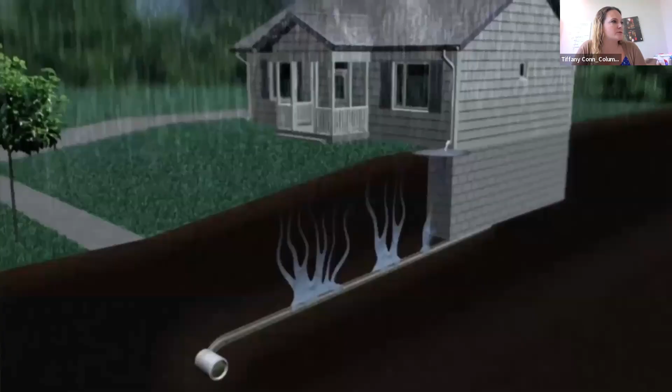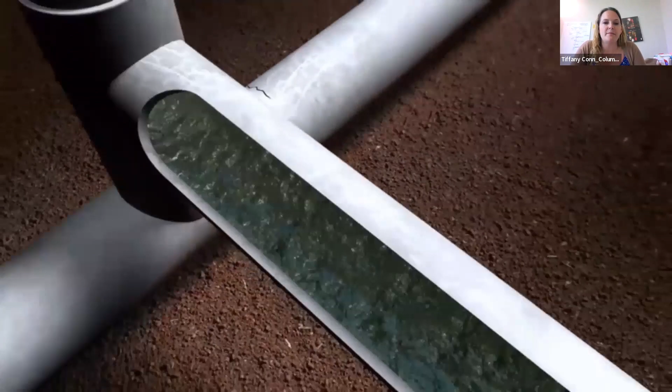So what's happening, and the reason why we're doing this project, is that rainwater is getting into our sanitary laterals through cracks and holes that could have been created because it's an old pipe or tree roots got in there or just damaged. What happens is that water fills up the sanitary pipe and it overflows. And so the mechanism for overflow that we have is that it goes up into your basement, or could also go out into the rivers and streams.

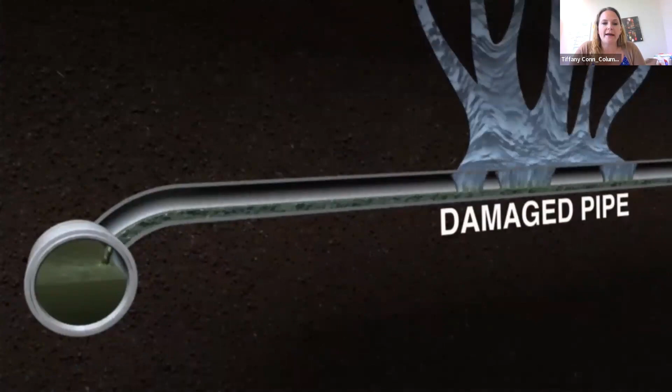So the sanitary sewer was not built to handle both wastewater and rainwater, and that is the reason that it is overwhelming with all this extra rainwater that's getting in and either backing up into your basement or overflowing out into the rivers and streams. So the EPA said that's not okay. We have to fix that problem here in Columbus. So Blueprint Columbus is our solution to that. We could have built lots of bigger pipes. We have that question a lot, but we tried to be proactive and innovative with our solution and thinking about how do we actually attack the problem at its source.

The way we do that is investing in fixing the existing infrastructure. So we actually want to seal up those holes and seal up that system and keep the rainwater from getting in there in the first place so that we can fix the problem at its source.

We use local materials, local crews for the most part, and we use native plants always. And these are key parts of our project. Native plants help just keep everything here. They're special plants, so they can handle rain, they can handle drought. We use all native plants in our gardens.

And also we want to improve stormwater discharges. So we're trying to fix the problem itself, but then also create better, cleaner quality water in our rivers and streams. And we do draw our drinking water from some of those sources, so that just helps to improve it from the source.

Our project adds permanent local jobs. So not only do we need people to build rain gardens and do the other work that we have on the project, but we also need a workforce to maintain them. So our actual project goes to 2045, but then is indefinite as far as maintenance goes. So that is definitely a permanent local job that we are creating, many of those.

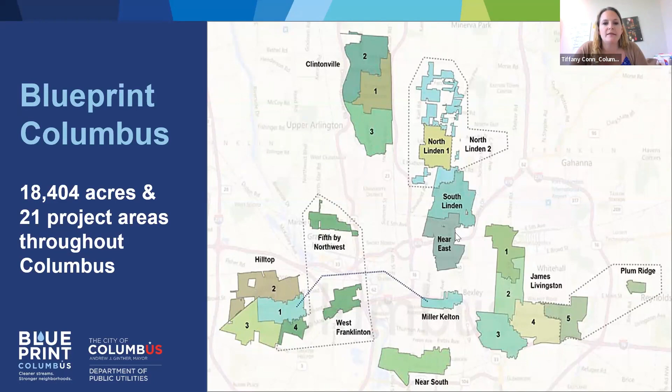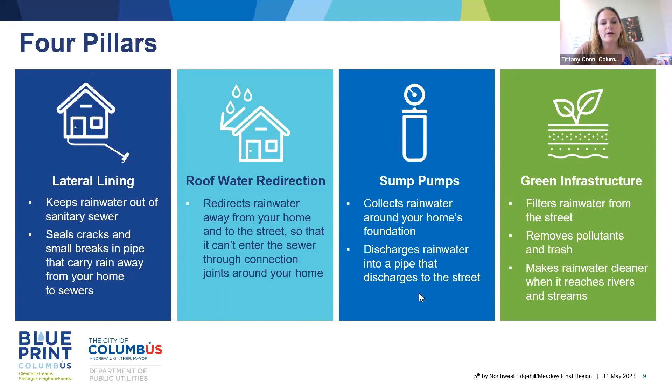Okay. So we have 4 different pillars, we call them, or tools in our toolbox to fix this issue. I'll go through these in a little bit more depth after, but I'll go quickly. Lateral lining, roof water redirection, sump pumps, and green infrastructure.

So, deeper dive. Lateral lining is what I was speaking of when I say we want to attack the problem at its source. We want to seal up our pipes so that that water can't get in. So what we do is we send a balloon-like thing through our manhole and up the sanitary lateral. On the outside of the balloon, it has a resin on it, so a sticky resin. When they blow it up, it sticks to the inside of the pipe and they let it cure. And when it cures, it hardens just like a brand new pipe inside of a pipe.

And that keeps out the tree roots and it keeps out the rainwater. And so we're sealing up that system. And this is a really effective way of doing so. It's also a great improvement to your property and most of the time very non-invasive, so you might not even know it's happening.

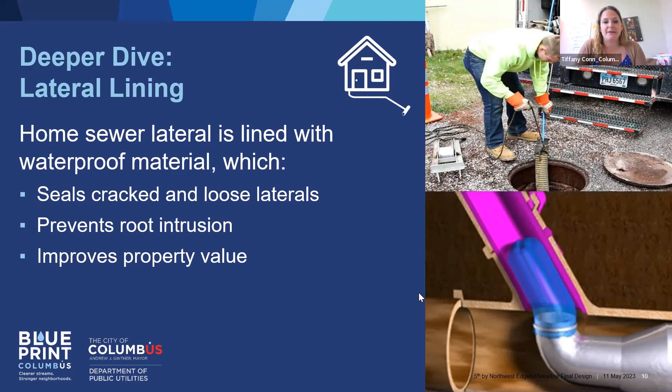Roof water redirection. So the next 2, roof water redirection and sump pumps, we're moving the water away from our house. So the water is getting in through the lateral line through cracks, but the water can also get in through where your inside pipe for your sanitary connects to the outside sanitary pipe. That's also a source of where the water is getting into the pipe. So what we try to do is move that water away from your house's foundation and out to the street.

And that way it's keeping it away from getting into that connection. So downspout redirection, we look for downspouts that splash maybe on splash pads like you can see in this top picture. Lots of older houses have that. And we look for where we can get those out to the street or at least 7 feet away from

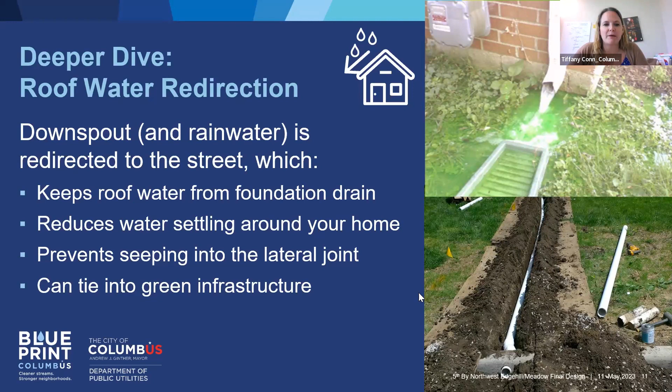your house if possible. So not every home in every project area will get downspout redirection, but we look at all of the downspouts and see where can we do the best for getting this water away from the home's foundation. And when we try, we get it out to the street and we hopefully can direct it towards green infrastructure wherever possible. Again, with the sump pump, water around your foundation means water is seeping down.

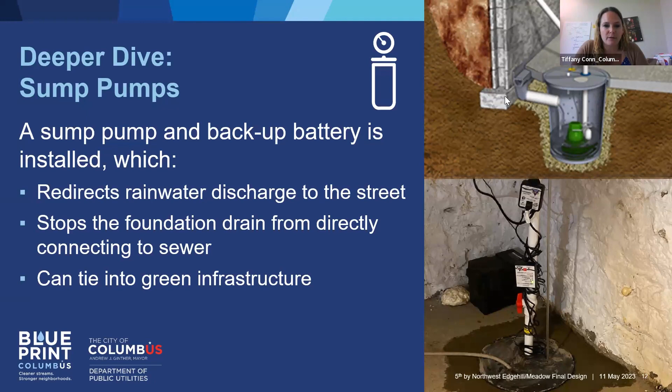So all residents in active Blueprint areas that do not have a sump pump or have a sump pump that does not work are eligible for a sump pump inspection. So this is a voluntary piece of the program, and we have a meeting with the homeowner and talk about, could we put a sump pump in here? Would you like that? And this is what it takes as far as construction wise. But this is a free thing. So it's a really amazing part of our project. And if you do not have a sump pump or you have one that doesn't work, please let us know.

Green infrastructure is what we'll mostly be talking about tonight. So the other pillars, either sealing up the system or removing the water away from our foundation. And the green infrastructure is there to take on that water. So we've moved a lot of water around and we need to make sure it has somewhere to go. And we also know that water rushing down the street picks up anything that it finds. So that could be leaves, that could be trash, anything on the street, which in the end goes to the storm sewer, but then out to our rivers and streams. So if we route it through green infrastructure, it acts like a filter, and we can actually improve the water that comes out into our rivers and streams.

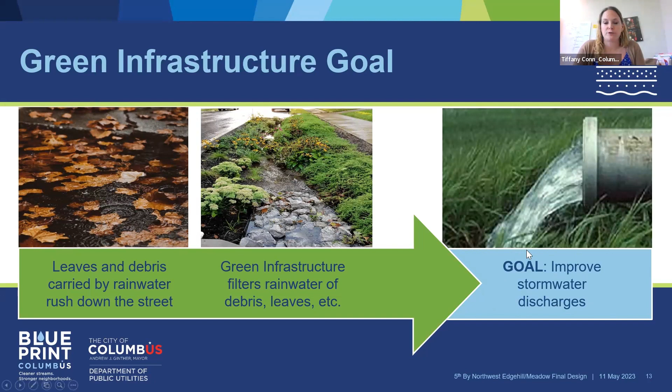These are some of the rain gardens and other types of green infrastructure that we currently use. So I'll go through these pretty quickly. We have behind the curb rain gardens with 2 walls. These have stacked stone. We have behind the curb rain gardens with no walls. These are a little more natural looking. They kind of blend in with the tree lawn. Bump out rain gardens, which, like they say, bump out into the street about the width of a parked car. These are great for capturing water running down the street, but also for areas that appreciate traffic calming.

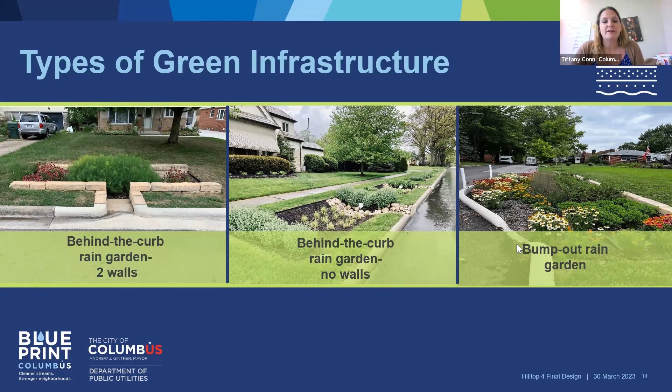Silva Cell is one of our newer tools. So if you can see, there's a little rain garden here, and then underneath the sidewalk, there's an area that retains water. This is a fairly new tool that we have. We have 2 of these built in Linden so far. Regional rain garden is a larger rain garden. We like to put these in traffic islands or sometimes land bank parcels or lots that the city would buy and put a larger rain garden in there. And we can treat lots of stormwater and impact less residents directly with this type of rain garden.

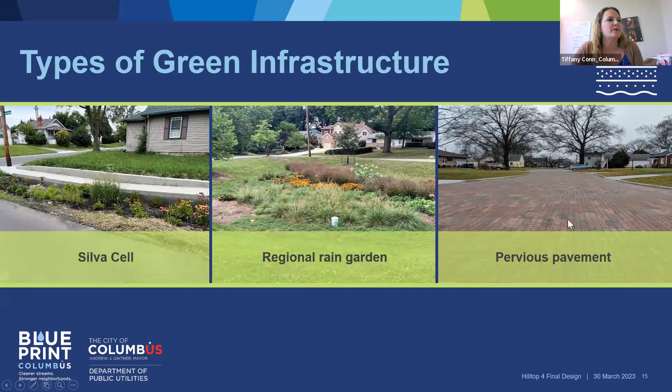And then pervious pavement. So we use these pervious pavers that join together with little tiny stones in between and look like this when they're finished. So it looks like a brick street. It's not actually a brick street, but it's a very nice tool to have. This is how this all works together. So green infrastructure itself, if you see this profile of a rain garden, our rain gardens are nature's natural filtration devices. And so we try to route the water there, either off of the street or through routing the sump pump to the street or the roof water to the street.

And the plants on top, like I said, are native plants, and they're good in flood and they're good in drought. You soak up some of the stuff, then it goes through layers of mulch, what we call bioretention soil, which is a mix of soil and sand, and then layers of rock underneath. All of our rain gardens are special. They have an under drain that connects to the storm sewer system. So any water that gets in there that filters through goes into a perforated pipe and then eventually out to the storm sewer and then out to our rivers and streams.

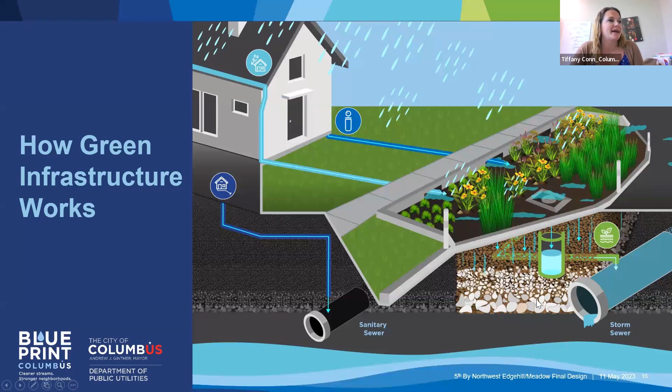This diagram shows that we're trying to keep these 2 systems separate, right? So here's a sanitary sewer down here. We line that lateral and we keep all the wastewater going to the sanitary sewer. All this other stuff we want to route to the street, that rainwater, keep it away from the sanitary sewer, clean it when we can, and then get it to the storm sewer.

So pervious pavement works a lot like a rain garden. Like I said, the pavers on top, and then layers of the stone and aggregate underneath. The pervious paver streets also have an under drain, so that would seep down through the cracks between the pavers, clean it as it goes, and then eventually make it to that perforated under drain and out to the storm sewer as well.

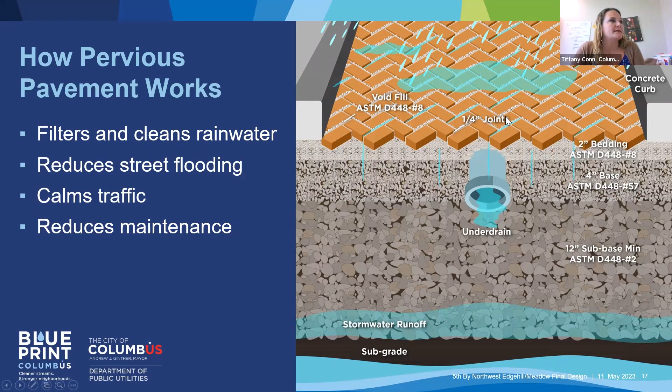Pervious pavement is nice. It's got a lot of benefits to it as well. It's pretty heavy construction. They dig down pretty deep and it's a pain in the neck during, but then afterwards, it's a very smooth street. It does calm traffic just because when you see something that looks different than asphalt, you're going to automatically just slow down a little bit. And then there's also reduced maintenance. So we have special trucks that come. We work with the Department of Public Service and they sweep these streets regularly. And then also we have trucks that re-chip them. So the little tiny pieces in between the pavers are necessary to maintain the spaces between. So we do that as well.

All right, how do we choose where to put what? So our design engineer and our project manager, they work together with their teams and they look at where are the problem areas? Where do we see either ponding water or where is it that we know we're going to have more water that we need to take care of? We look at how much water we're needing to control and where does it flow naturally. But we're also looking above ground and below ground for barriers. Are there trees? Are there fences? Are there utilities underneath the ground that cannot be moved or that we can't work around?

And then also what would improve the neighborhood? And that's where the residents come in and we try to ask you all, what do you think? Do you think this is something that you would like and that would help you in some way, or get input from the residents from the start.

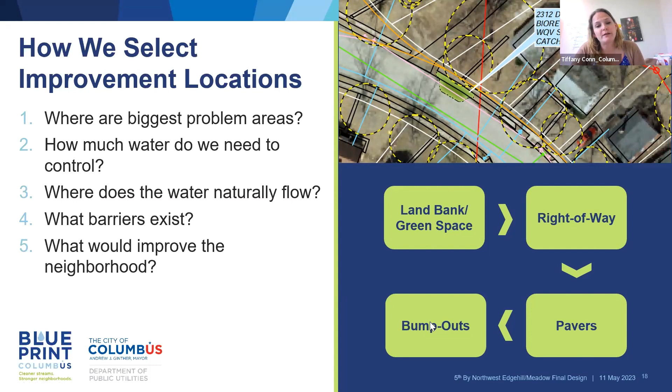So we have a priority list. I kind of went through it before, but we try to use the land bank or the green spaces first because those big regional rain gardens are less intrusive to individual residents. But if not, we look for spaces in the right of way that are, again, not very many barriers or in places that really need a lot of water controlled. And then we go pavers. So pavers are great. They're a little bit costly. So that's why they're third on the list. And then bump outs, and only really because of previous concerns with residents, they do take parking away. So that is something that is a negative about bump outs, unless you're looking for traffic calming, right? But that's our priority list.

And then again, because the under drains in our rain gardens and our pervious pavement connect to the storm sewer, the city will maintain these indefinitely. So we have no expectation that residents will weed or mulch or clean any of the rain gardens or pervious pavement ever. All of this is done by our maintenance team. So they come out about once a month or more if necessary, and they do the weeding and mulching. They look for plants that have died or need replaced. They remove the trash, check all the hardware and under drains, and remove sediment. And then eventually they will replace the bioswale when it needs to be done. So again, the city will always be responsible for all the maintenance in these rain gardens and pervious pavement.

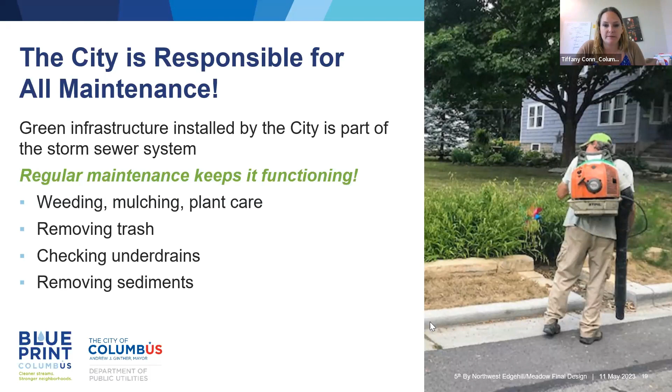All right, right now if you have any general Blueprint questions about what I just presented, we can go ahead and answer those.

Nobody? Yes, we've got a question. Okay. Just a couple things.

They went in and paved our road that you guys are doing this on, Eastview Avenue between 3rd and 5th. And we've been getting all the signs saying you're going to start doing the pavement and the water gardens. And the thing is, you just kind of said something, that not everybody's home is going to get tied to these, their home water or foundation water. The downspouts are going to get tied to all of these gardens, or even the permeable pavement.

The question we have is, we have painstakingly worked to get it out to the road. All of our gutters, the downspouts have been replaced. The problem is when they paved it, they're now below the surface of the road. We've talked to Columbus on this. Nobody has addressed this issue. The curbs are so low that some of them are below or at level with the road.

And we're wondering if you're going to come in, and they said no one's going to remove the granite. They're just going to kind of do a curb and then drop it to it. But what happens if one of our houses is not being tied to that? We're now dealing with downspouts that aren't draining to anywhere. They're just stuck, and we had to put cleanouts in to get a blower to blow the water out of there.

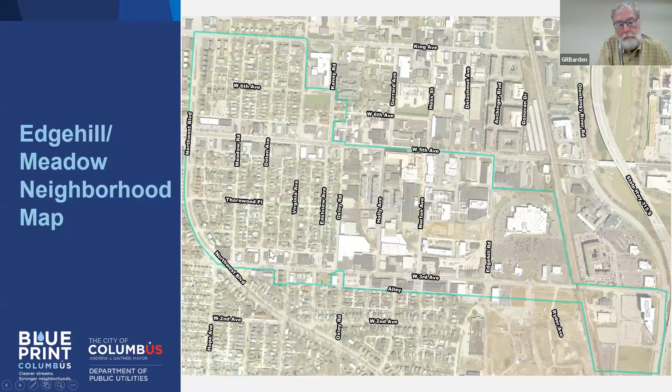Looking at this schedule, currently we're at final design. We have 100% plans that have been submitted for routing through the city review process. To date, we've held two public meetings, one in person, one virtual. We've incorporated the resident input as well as input from the other city departments. Being at final design means we hope not to make too many changes to the plan set. We want to solicit input on the planting preferences, as Tiffany mentioned, from residents and businesses that have rain gardens located near their property.

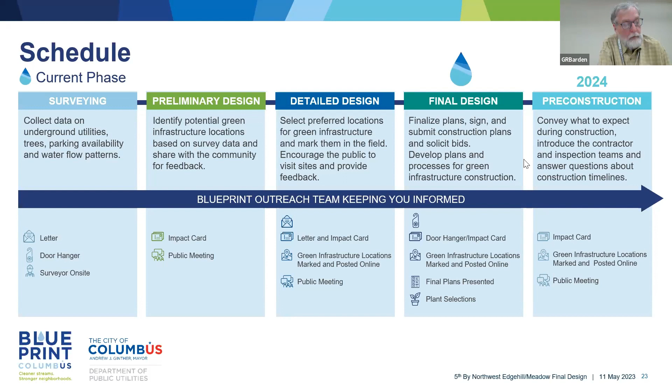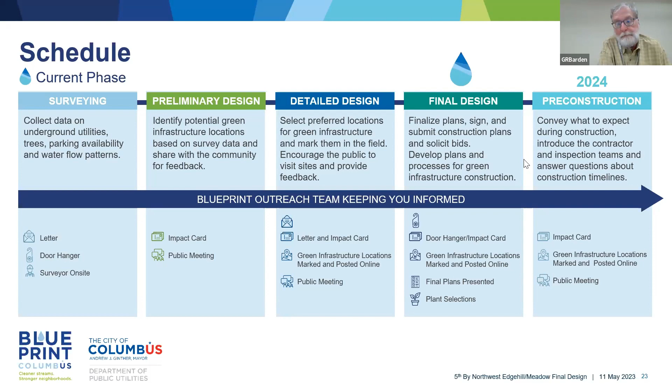So the next steps are to finalize the plans, bid the contract, then schedule and hold a public meeting in person with the residents, the contractor, and our inspection teams. Currently, our projected schedule shows final signed plans in fall of 2023, we'll bid the contract in fall of 2023, and we'll schedule the pre-construction meeting in spring of 2024. I will now hand over to Patrick Karnes, the project manager with Strand and Associates. Thanks, Greg.

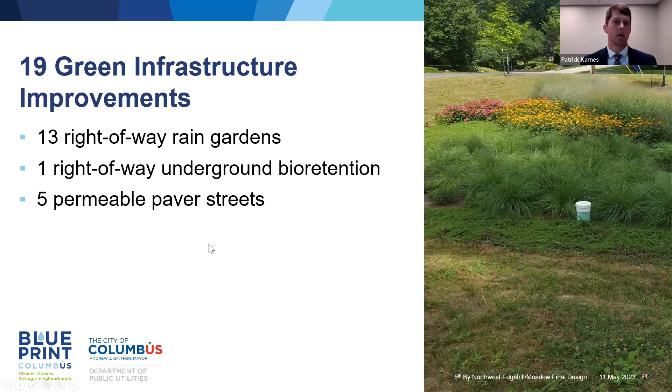Thank you, Greg. As Greg mentioned, my name is Patrick Karnes. I'm with Strand Associates and the project manager for this project. In this project area, generally King to 3rd and Northwest to Eastview, we have 19 proposed green infrastructure improvements, 13 of those being rain gardens within the right-of-way.

So as you saw during Tiffany's presentation, those are the ones that are located behind the curb lines in the right-of-way, of course. Kind of think about it, that area behind the curb to 10 to 15 feet off the back of the curb. There is one right-of-way underground bioretention basin. I'll get into a little more of what that is with some visuals in a minute.

And then 5 permeable paver streets. These are on north-south streets, and I'll talk about the specific locations here momentarily. But they will go from block to block. They'll go a full intersection to intersection length.

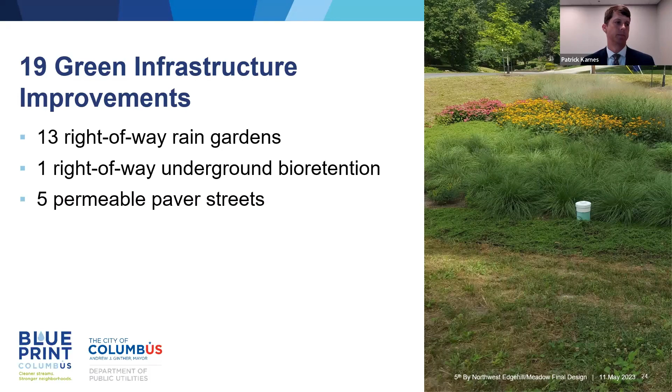So as was already discussed, you'll see the curb line reconstructed in the area of impacts by these rain gardens. They will have 4 concrete walls, much of which will be underground and you will not see. And then in the middle of those, you're going to have a mulch surface that is going to be depressed slightly from the road.

And then that's going to be filled with the plantings, which, as mentioned, residents that are adjacent to those basins will have an opportunity to make suggestions about the types of plants from a palette that is available from the city of Columbus for plants that work well in these installations, because these things do fill up with water. So we want to make sure we're selecting plants that are resistant to being in saturated situations. So once it's done, you'll primarily see these concrete curbs around the 4 walls, and then the plantings in the middle.

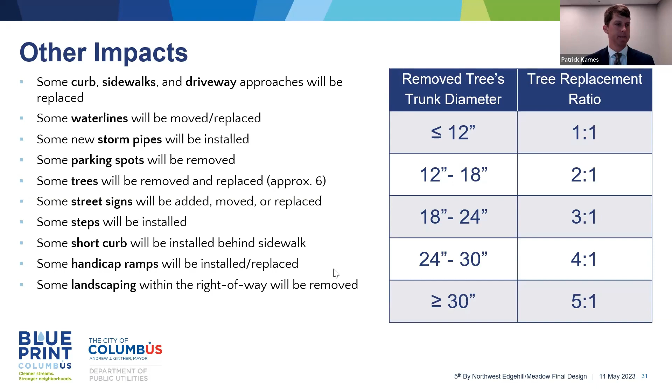Okay, so I'm going to talk a little bit. I know we have a couple questions in the chat and hands raised. We just have 2 other quick things to touch on. So one of which is the plant survey.

So as Patrick mentioned, there are 13 basins being put in. If your home is adjacent to any of those basins, so those 13 residents, we are going to be sending a plant survey to you within the next week or so. And basically this is going to provide you with an opportunity to weigh in on what plants you'd like to see included in the basin.

So it is within a palette of native plants that work well in these rain gardens. But if you have preferences on color or plant type, we have a bunch of options you can select from there. So if you are one of those 13, keep an eye out for that. We're going to mail a physical copy to the residents, but then we will also do some follow-up if we don't hear back from people. So just note that. And then Tiffany, if you want to go to the next slide here.

Just recapping. So we'll go to questions in just a second. But really recapping what's next. So as we mentioned, this is final design. Pre-construction is the next big milestone for this project, which will happen in the spring of 2024. This meeting today is being recorded and will be posted on YouTube. It will be on our website. So if you have neighbors and friends who weren't able to make it today, that will all be available for them.

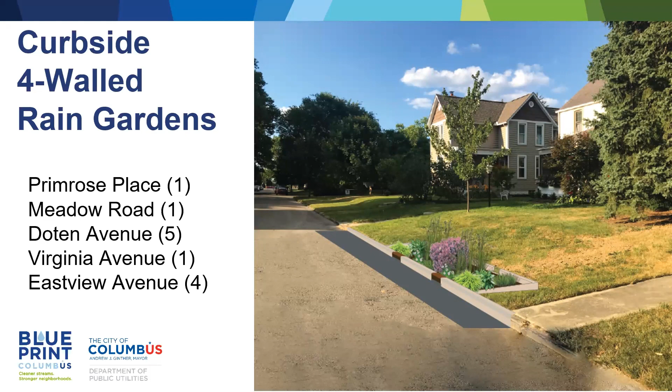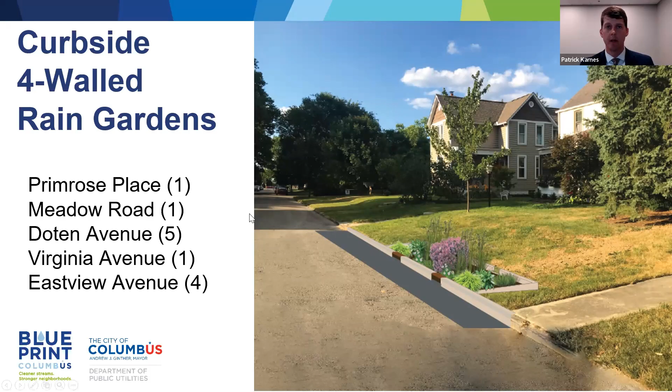So I can't speak specifically to the sump pumps being added. I guess, Tiffany, has any Blueprint sump pump work occurred in this area to date? Yes. Okay, all right. Sorry, I just wasn't sure exactly where you guys were in the schedule. So some of that water will go to the basin at the corner of 5th and Meadow there. Some of that water will flow there. Some of it should flow past that. That's the intent of the design.

During the design process, we modeled the proposed conditions and looked at, as Tiffany mentioned, that 10-year return storm event. And then we estimate where sump pump additions will occur, and try to account for that water. Again, those are estimates, because during that point in the design, we don't know what sump pumps will be added.

I understand that. I understand the big storm. Literally, we had kayaks going down the street, so we understand that's not something that's happening all the time. This is during typical, everyday storms. And what I don't understand is, if you're not going to do anything to the road, how you expect the water to drain down the street to this rain garden and go into that new drainage, which looks like it in the picture.

I mean, I'm not an expert, but it's a pretty flat road, right? So unless you're going to repave it to where it's actually going to drain down there, we're just going to have standing water significantly on our curbs on a regular basis. That is our new problem. While the sump pumps have been great, it's created a problem for us that needs to be resolved. I came in late. If Chip was complaining he didn't want the pervious pavements on Eastview, we can go ahead and swap them out if that's an option.

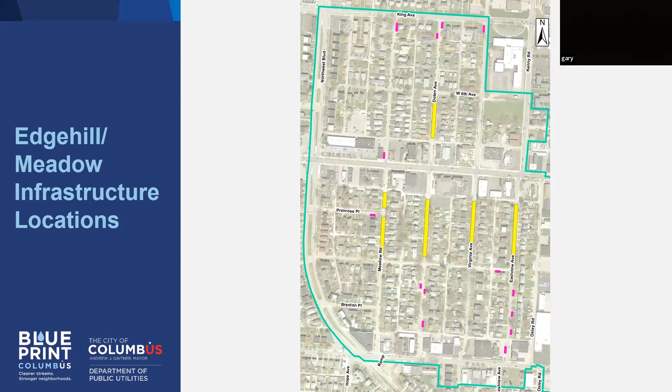Yeah, I guess Tiffany and I can talk about how we handle that, but yeah, I assume so. Okay. That's all I have. If I can look at the plan sometime or meet with someone, that'd be really great. Sure. Okay, and I did just throw our email address in the chat. I think it should have gone to everyone. So if you think of additional questions, please feel free to reach out.

I think we have one more that just came in. A common issue which I'm hearing and which exists on Virginia between 5th and 6th is when the streets were repaved a couple years ago, the curb height was completely eliminated, and it also impacted the flow of stormwater towards the drains and water stands in the street. I think that might have been what we talked about earlier. Patrick, do you have other thoughts on that, or Greg? Greg, do you want to jump in on that?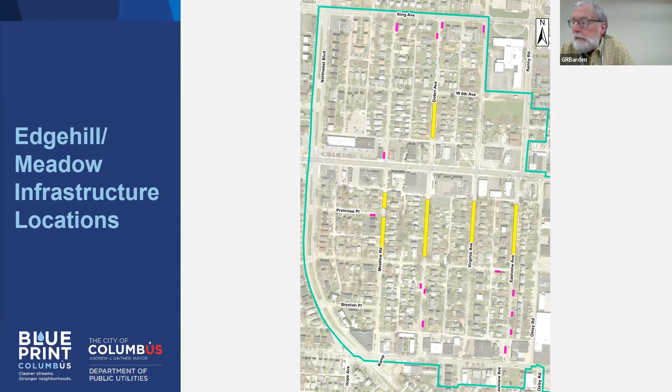Virginia, 5th and 6th on Virginia. Well, currently we don't have anything planned for blueprint in that location, if I'm understanding correctly. I would agree. I know you don't like to hear it. I think if you're having an issue and we're not going to address that, try to reach out to DPS and just make sure they know that this is an issue. I don't know that they're going to do anything to fix it, but it should be brought up to them that the flow of the stormwater is not happening.

So I would just encourage you to either call 311 or just report it, so that way it's recorded and somebody knows that this is an issue. I know it's not the greatest answer, but it's kind of all we got for that.

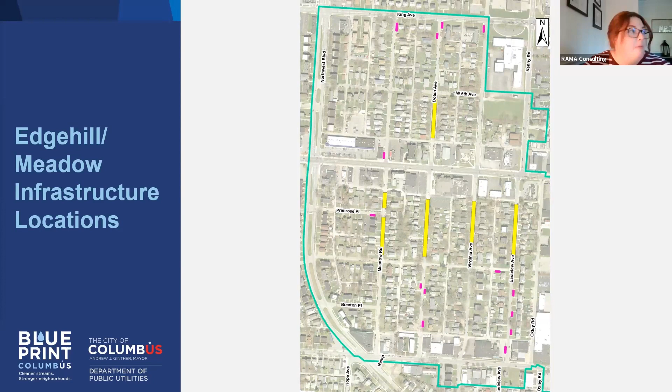Okay, well, I think that's all the questions we have at the moment. I want to be respectful of everyone's time on this beautiful evening. So we can jump to the end, and Tiffany, we can pull up our contact information. This project is unique in that we do have the dedicated outreach team, which means we have a dedicated email address, phone number, website. So please feel free if you think of another question this evening, or I know there's a couple people we need to follow up with, give us a call, shoot us an email. We'd be happy to come out. We can send plans, whatever we can do to better communicate what is happening on this project.

And like Lee said, we will be in person next spring, and hopefully we'll have all your neighbors. My understanding is there was a pizza crawl tonight that might have been a little bit more exciting than this. So hopefully for the next meeting, we can have a big crowd and make sure we are communicating everything so everyone is clear on what that construction process looks like.